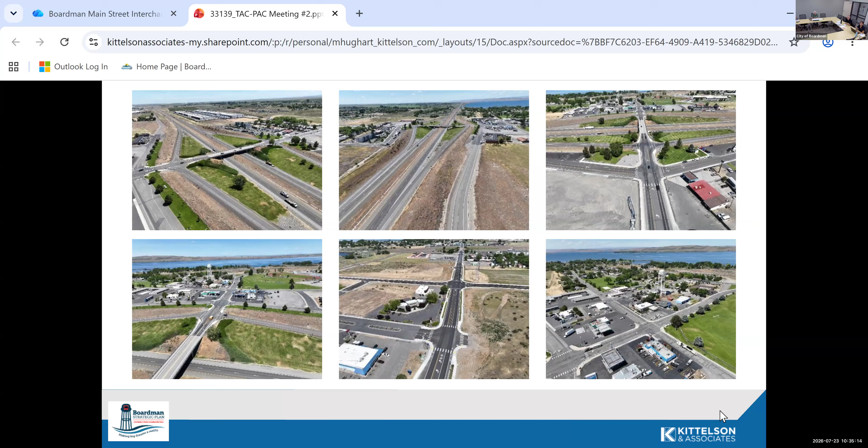So these pictures, again, I just kept them up there for reference purposes. We can come back to them, but they're drone pictures that we had taken a couple months ago, showing just various perspectives of the interchange and the local circulation system and Main Street. So I'm leaving them there for references, but we'll come back to them if we need them. So next slide. Go ahead and skip past this as well.

One more. Okay. So you might remember this slide from our kickoff meeting, and I kept it on here just for perspective, but these yellow lines represent all of the kind of the collector level facilities that exist within the vicinity of the Main Street I-84 interchange. And I think the important thing to note is there's been a lot of movement on the city's part, particularly on the south side, to implement the vision that was created with your current IAMP that we're trying to update here.

I think maybe on the south side, it's kind of important to note that the southeast and southwest quadrants of Front Street have been fully completed, along with kind of a westerly extension of Oregon Trail Boulevard. And then everything that you see in dashed yellow represents planned future extensions or development continuation of that circulation system that will be implemented either through capital projects by way of Oregon Trail Boulevard, or more than likely development that will occur in that kind of southeasterly quadrant south of Oregon Trail.

And this represents kind of the heart of what the city has been trying to do to accommodate the circulation needs of this interchange. And I'll give it back to Carla because I think she wanted to point out a particular change that's on the books that the city is considering at the moment.

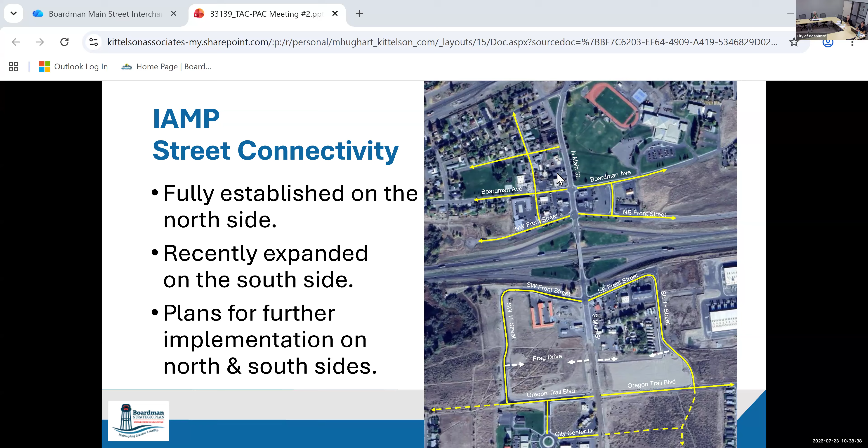Okay, so next slide, Carla. Sorry. It's okay. So you might also remember this slide as well. This is just a visual representation of the various projects that were included in the current interchange area management plan. I'll keep using IAMP from this point forward, even though that's not any easier to say than interchange area management plan sometimes. But these are the summation of the projects that were in the IAMP.

So on the left-hand side of the slide, these are all kind of near-term visionary projects that include, at a minimum, some modifications to the westbound and eastbound off-ramps, widening and or lengthening of those off-ramps to better accommodate the traffic demands that are currently out there. So the widening and lengthening would be working within the current bounds of those off-ramps themselves.

There's plenty of right of way in there, but there's embankment and slopes, so it's not just as simple as moving some earth. It's a little bit more challenging, but that was a noted need 14 some odd years ago that still exists and exists more importantly, I think, in today's traffic scenario, as you may have experienced over time.

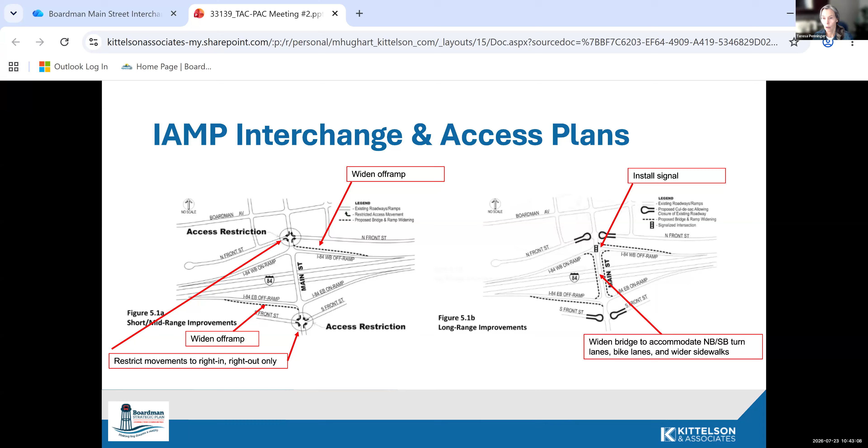Teresa, I know you're on, and you were probably the only person on the call or in the room here today that was around for that previous IAMP. So did you have anything you wanted to add to my quick and dirty summary there? No, I think you did a good job summarizing that. Okay, good. All right, next slide.

Okay, so these next slides are, can I actually drive the? Yeah, you can certainly drive. At least I'll use it to point.

Yeah, perfect. Okay, so these next slides, we're just going to go through the thumbnail images of the concepts that were shared out with everybody. So this first image on the left here, this is concept number 1. I'll give a very high overview of the details of these concepts. But just remember, these are sketches.

They're not meant to be a detailed engineering analysis, just a quick sketch to convey the general theme of the concept. But when you get into the details, the concepts are going to look a lot more detailed, and there's a lot more going on or likely to be needed as we try and implement one or more of these concepts. So just recognize them as nothing more than quick sketches so that we can convey the general thought going forward.

So concept number 1 is, I'm just calling it the diamond/tight diamond. So the diamond interchange is essentially what we have out there, and it gets its name from the geometry where you come on and off, and sort of a traditional.

Oh, sorry. Yep, thank you. Thanks, Matt. In my world over here.

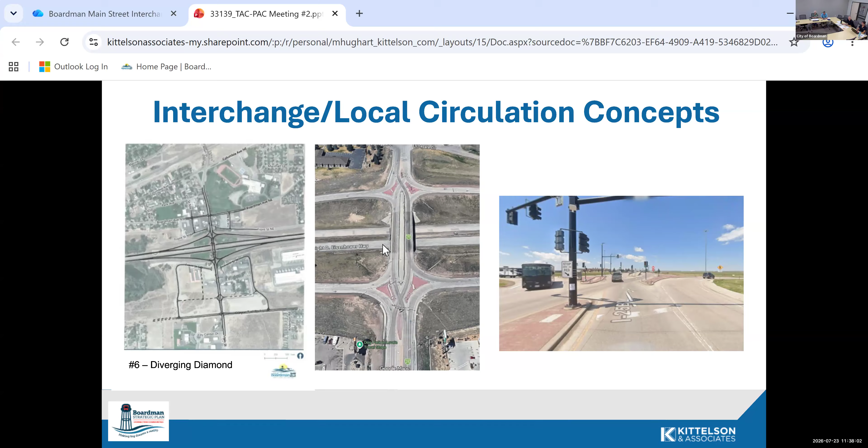Okay, we'll keep going here just for time purposes. Number 7, again, the sketch doesn't do it justice, but this is what we call a single point urban interchange, or a SPUI, if you've heard that term before. This is the SPUI down in Medford. So there is one of these in the state of Oregon. There's going to be another one here shortly, or in construction. But this is the one down in Medford.

And essentially what you do is you bring the entire interchange itself, the 2 ramp terminals, and you basically combine them into one. And you have one signal in the middle of the overpass structure that controls all the movements. So if you're making a left turn off the freeway or a right turn off the freeway, you are subject to that same signal that everybody else is subject to. So you don't have separate ramp terminals. You have one giant intersection kind of in the middle.

To make something like this happen, you actually have a pretty wide and enlarged overpass deck. As you can see in this example, this one is a little wider than the lanes, but that's more of a design challenge that they had to deal with at the time. So tight. Yeah, because it's so tight. So you may not have to have it as wide as this particular example, because the spread of those overpass on and off ramps are a little wider here in this case.

But the single point urban interchange would, I think, provide at least one significant benefit that you don't get with any of the other concepts: you more than likely have the ability to unequivocally keep Front Street connections in place. Now, probably not full access, but you definitely have a scenario where you can more than likely keep those right in, right out. And it's probably not a question like it is in some of the other concepts. That is, I think, one of the biggest benefits of the SPUI, or the single point urban interchange.

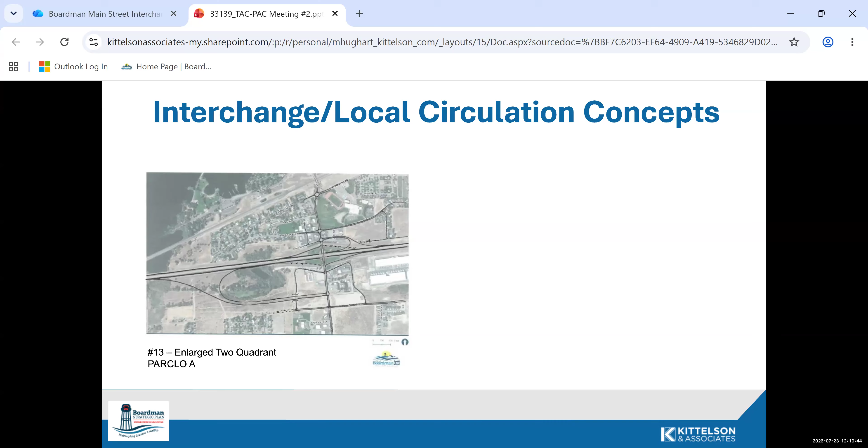Just for the same concept, but I don't think the right in, right out, or cutting off streets is the right direction. And I'm going to echo that. The right in, right out, and the cutting off Front Streets, in my opinion, is kind of a no-go. But I had a question for you really quickly.

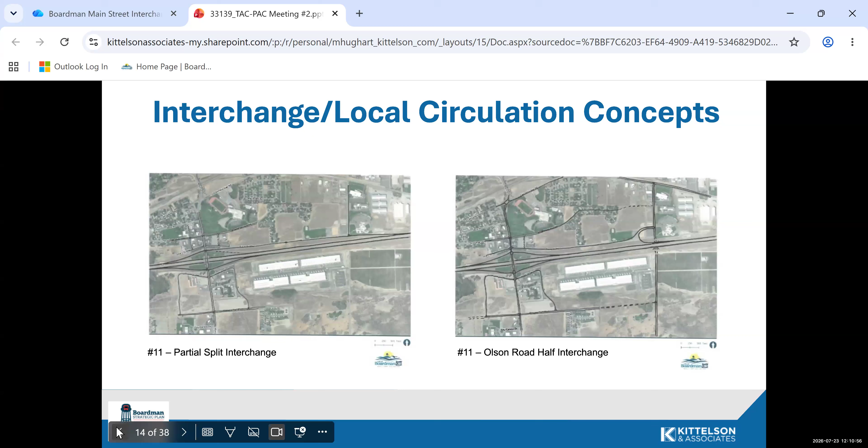So if I understand correctly, if we widen the overpass and we lengthen the off ramps to the freeway, that's not going to solve our problem. That's not going to limit the need for closing off Front Streets and right in, right out access.

Yeah, I think the forecast demand scenario here, and again, this is a 20+ year forecast with some fairly conservative, aggressive growth scenarios, but maybe it's not so aggressive considering how much growth Boardman has been seeing lately and how much development pressure they're starting to see from the development community.

But the demand profiles that we're showing here with all the residential growth and all the potential growth in freeway-oriented uses at this interchange, we're projecting some traffic profiles that just can't be mitigated without some pretty significant traffic control and widening scenarios. And simply widening and lengthening the off-ramps, it buys you a little bit of safety time, but it doesn't buy you capacity.

And that's where I think the limitation exists today: capacity is your challenge. Geometry is your challenge. Your built environment is your challenge. How do you weave an option together that minimizes and benefits the most? And I guess the question I wanted to pose to you all today is, of the 13 that we've shown here, certainly there's enough we can just throw away immediately and not even bring back to the table.

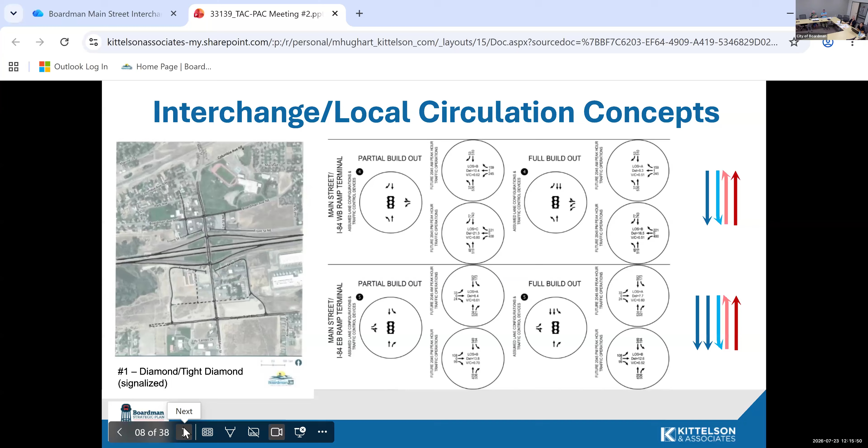But I will tell you that the stuff that has happened between our red box exercise, which I think is probably close to 2 years ago now, and today, I wasn't even close. I wasn't even close. I mean, you talk about one of those parclo options where you would bring the southeast quadrant over to that AWS. Well, there's 3 parcels there at the end on the east side of First Street.

So adjacent to AWS, well, the southernmost of those, we have a development proposal on, and it's going to planning commission. So that ability to do what you were talking about there, we're going to have a built environment there within the next year. Now the northern two parcels, which are the smaller two, would still potentially allow some availability, but I don't know if it's enough if you don't have the southern parcel. So again, it wasn't even in the red box. It didn't have a red box.

And another concept to think about too is we do have the Loop, which is a public transit system, and it takes the front streets, all of them. It does. Yeah, it loops around, and there's bus stops already there. And it's not saying that it can't be changed, but that's something else to take into consideration, that we do have a free public transit system. And their ridership has exploded. It really has. Yeah, I know, because I drive for them part-time.

So I just want to get to David's comment there and provide a response. I was thinking about how Boardman's going to grow over the next 5 to 10 years when we had the red box exercise, and I didn't see it. And I didn't contemplate a 240 unit apartment, another 240 unit apartment building. Because I thought, well, we've built Portview and we've built Tidewater. Gosh, will there be another one? And yet here we are. We've just approved another 240 unit apartment building.

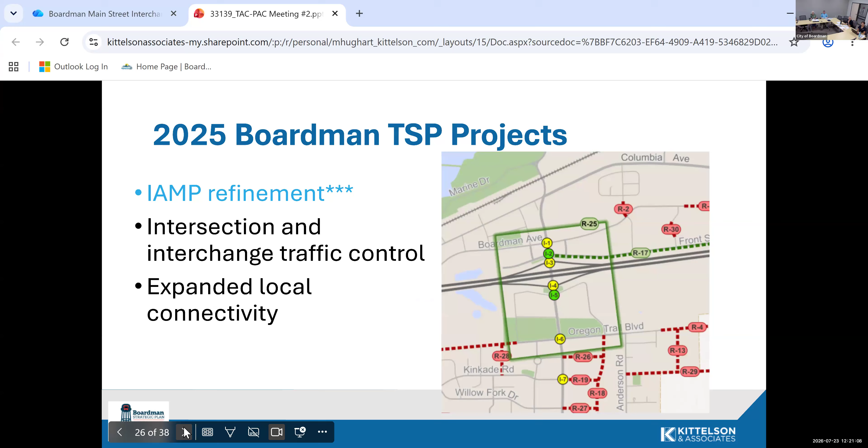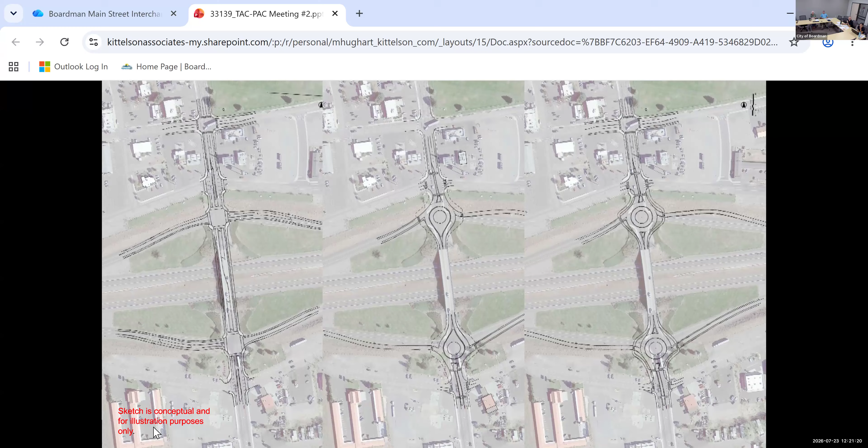And what I'm talking about is a sketch that looks something more along the lines of these type of ideas, where you actually have kind of a lane style sketch. Now, these were done many years ago before we had the volume scenarios in place, but yeah, I know you're going to gravitate to that one. But this is in a large roundabout scenario here.

I'm telling you, that one I think is our best bet, honestly. But I know there's a lot more hoops to jump through with ODOT. Yeah, I had that one as my top choice. Right. Well, we want to take these single line sketches and move them into ideas like this, but we don't have the budget and the time to turn every one of these concepts into this sketch level.

Can you turn that one to where it does the point like it does on number 3, to where they can't go around the oval, but they have to go back around? Yeah. Put the peanut on the end. Yes. So like on figure 3, where you have to kind of go back around, so they can't be going around and around the circle. They have to force them to go around. That would keep traffic flowing better.

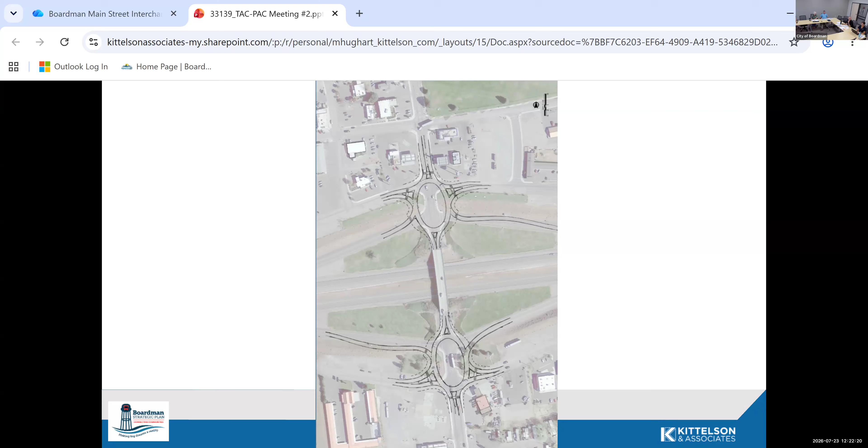And I will say that my other top choice would be number 7 with the SPUI. The SPUI? Yeah. Because it doesn't take away from the Front Streets. Yep. The only problem with number 7 is that it does have the right in, right out. That's my only concern. No, it's not right in, right out. You got left hand. In the description, though, it says it limits right in, right out.

At Front Street, yeah, with the geometry at the moment, we're conservatively showing Front Street as right in, right out, but there might be an opportunity to maintain it. But it's a detail that we can't really think about yet. Well, Front Street right in, right out is a path we're on now. Yeah, and Carla, we need to get off that path, because that path was implemented in 2009.

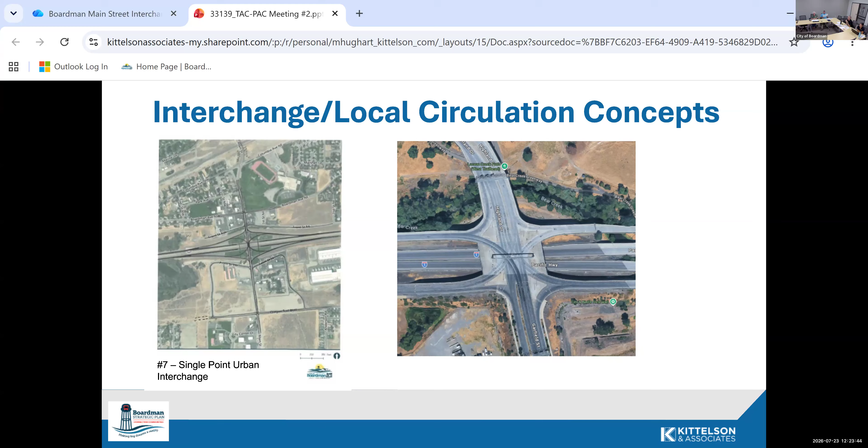Yeah, I think it's going to be a unique environment that is going to have some limited impact to Front Streets. As I've been looking at these, I think right in, right out might be the best option we get out of Front Streets. I don't disagree, Heather. It'd be great to keep them as full intersections, but the distance between the interchange and Front Street is really tight. But by doing figure 5, you would potentially avoid that. Yes, you're still right in, right out, but you're going around the circle.

Right. So figure 5, if we can figure out how to get through the policy issues with Federal Highway, completely maintains your Front Street options. Right, which is agreeable because on the south side, if they did right in, right out, it's only a half a block to go, and they have multiple entrances to get into their businesses there. Whereas on the other side, they have to go all the way down to Oregon Trail and all the way around. Like I said before, it adds a mile to their transit time.

Who's the other one? Not Kelly. This would be Kelly's question. It was the other lady. Teresa, would that be her question on this? I mean, how much more work are we going to have to do to be able to do these large roundabouts? Are you asking about getting it through Federal Highways? Yeah.

Yeah, that's actually like an approval process now. They consider this a change in access to the freeway. So ODOT makes the recommendation, but FHWA actually owns that approval by rule. Like I said, I think we could have some preliminary conversations with them about it. But until we actually turn in the report and they sign off on it, it would be very difficult to say for certain that approval will be obtained.

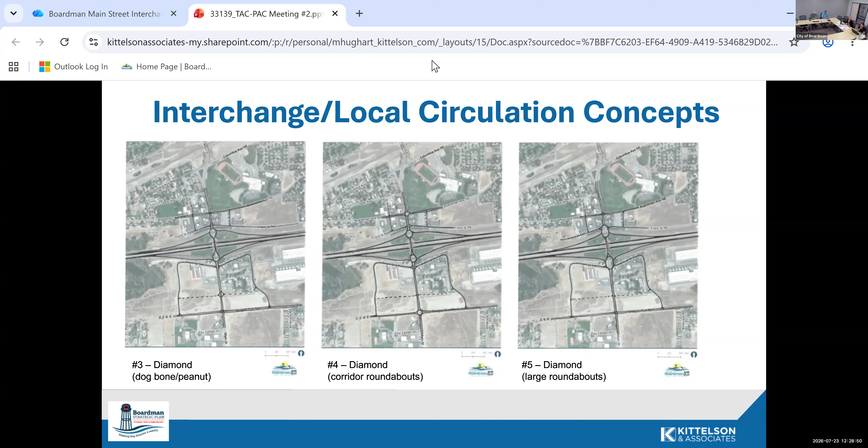Yeah, and for those of you who are really geeking out on this, we are recording this meeting. We will record the meeting this afternoon, and those will both get posted to the strategic planning page for the Main Street IAMP. Probably you won't see that until Monday. By the time they download and staff are able to upload them, they might get posted tomorrow, but I would encourage you to go look come Monday. And maybe what I can do also is take that blank sheet that you've got and put that on the page also, so people could go to that page and get it there, rather than trying to figure out who needs to get it emailed to them. We'll just post it on the page as well.